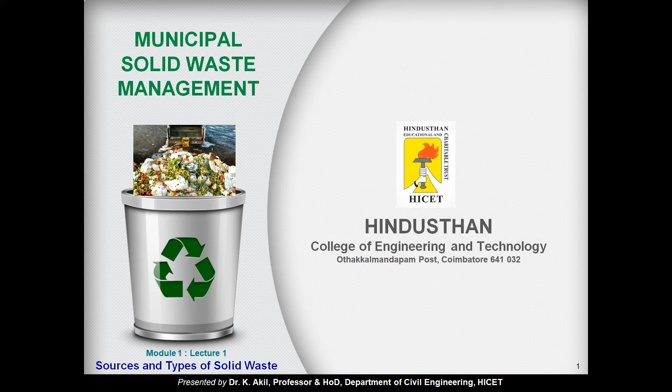The learning objective is to gain knowledge on the types and sources of solid waste. Due to rapid increase in the production and consumption processes, societies generate as well as reject solid materials regularly from various sectors. The considerable volume of waste thus generated and rejected is called solid waste. In other words, solid waste are the waste arising from human and animal activities that are normally solid and are discarded as useless or unwanted.

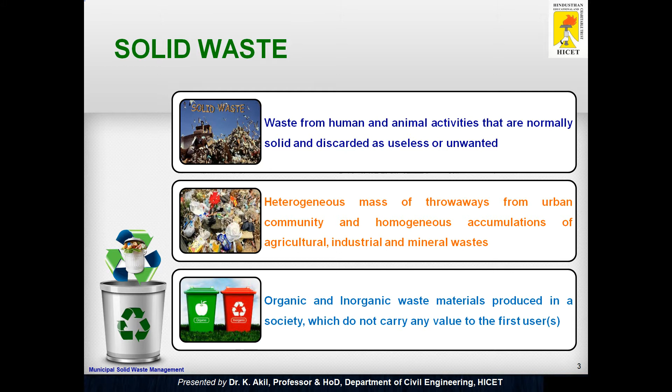Solid waste encompass both a heterogeneous mass of throwaways from the urban community as well as a more homogeneous accumulation of agricultural, industrial, and mineral waste. Solid waste are the organic and inorganic waste materials produced in a society which do not generally carry any value to the first user or the users.

Classification of solid waste. Solid waste are classified on the basis of source of generation and type. Source-based classification. Historically, the sources of solid waste have been consistent, dependent on sectors and activities, and these include residential, commercial, institutional, municipal, industrial, agricultural, and waste from open areas.

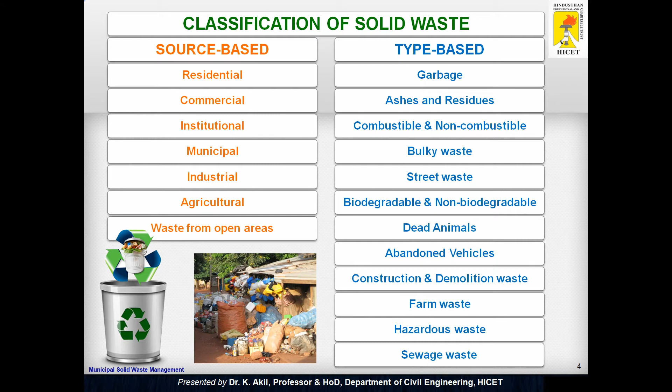Type-based classification. Classification of waste based on types, that is physical, chemical, and biological characteristics of waste, are garbage, ashes and residues, combustible and non-combustible waste, bulky waste, street waste, biodegradable and non-biodegradable waste, dead animals, abandoned vehicles, construction and demolition waste, farm waste, hazardous waste, and sewage waste.

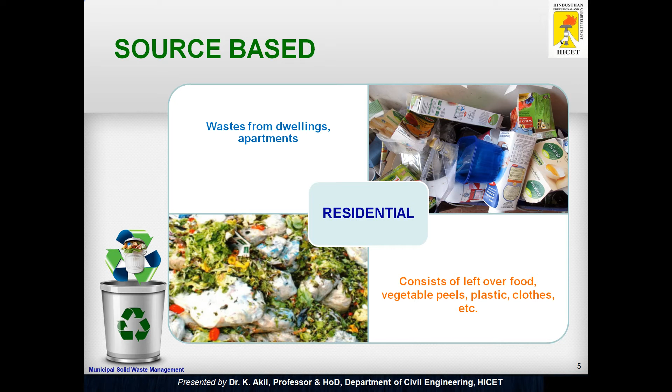Now coming on to the source-based classification. The first category is the residential waste. This refers to waste from dwellings and apartments and consists of leftover food, vegetable peels, plastic, clothes, ashes, etc.

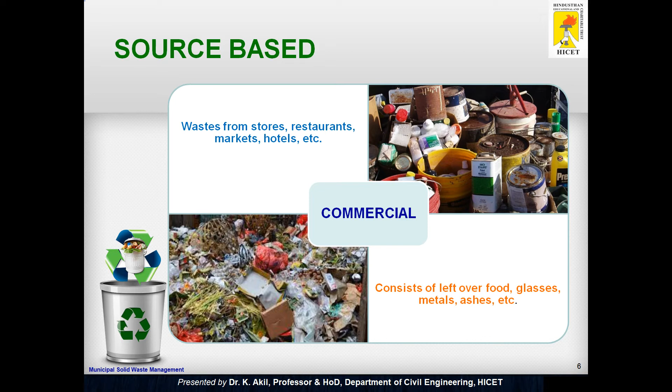The second category is the commercial waste. This refers to waste consisting of leftover food, glasses, metals, ashes, which are generated from stores, restaurants, markets, hotels, motels, auto repair shops, medical facilities, and so on.

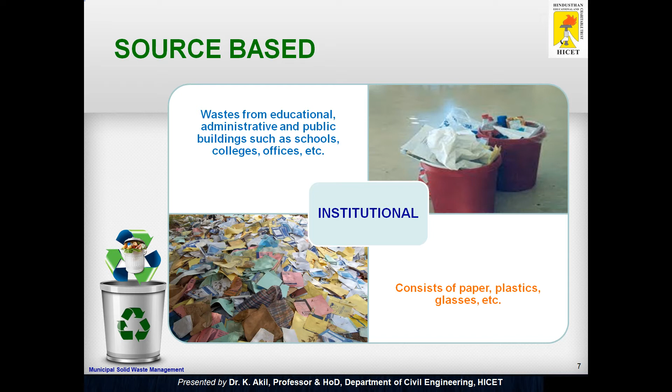The third category is the institutional waste. This mainly consists of paper, plastics, glasses, etc., which are generated from educational, administrative, and public buildings such as schools, colleges, offices, prisons, and so on.

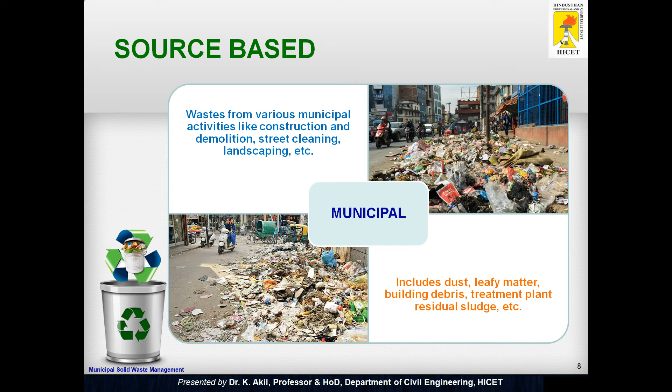The fourth category is the municipal waste. This includes dust, leafy matter, building debris, treatment plant residual sludge, etc., which are generated from various municipal activities like construction and demolition, street cleaning, landscaping, and so on.

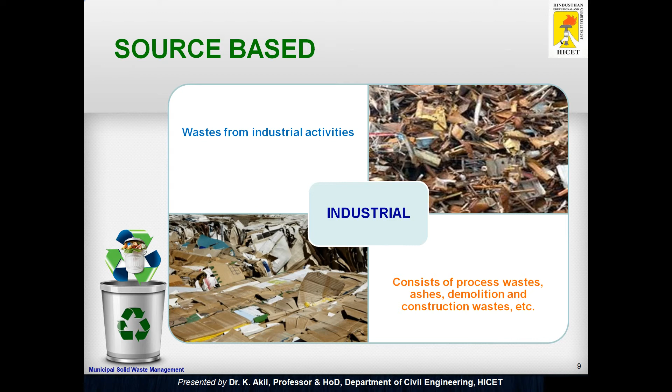The fifth category is the industrial waste. This mainly consists of process waste, ashes, demolition and construction waste, hazardous waste, and so on due to industrial activities. The next category is the agricultural waste. This mainly consists of spoiled food grains and vegetables, the agricultural remains, litter, etc., which are generated from fields, orchards, vineyards, farms, etc.

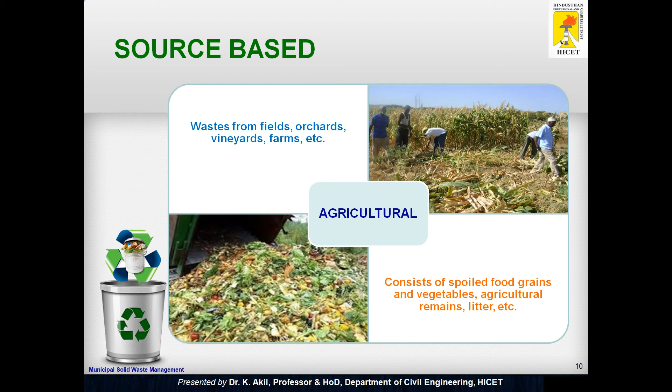The last category under source-based classification are the waste from open areas, and these include waste from areas such as streets, alleys, parks, vacant lots, playgrounds, beaches, highways, recreational areas, and so on.

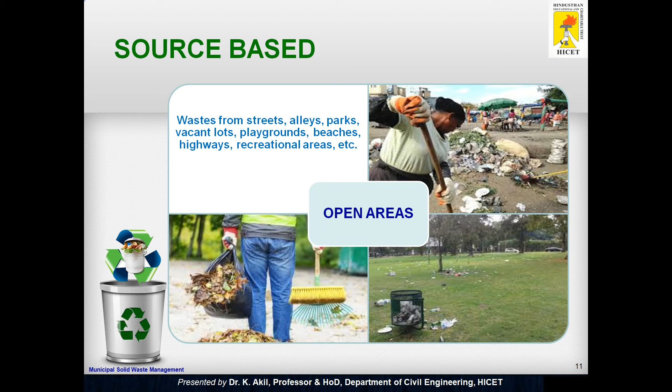Coming on to the type-based classification. The first category is the garbage. This refers to animal and vegetable waste resulting from the handling, sale, storage, preparation, cooking and serving of food. Garbage comprising these waste contains putrescible organic matter which produces an obnoxious odor and attracts rats and vermin. It therefore requires special attention in storage, handling and disposal.

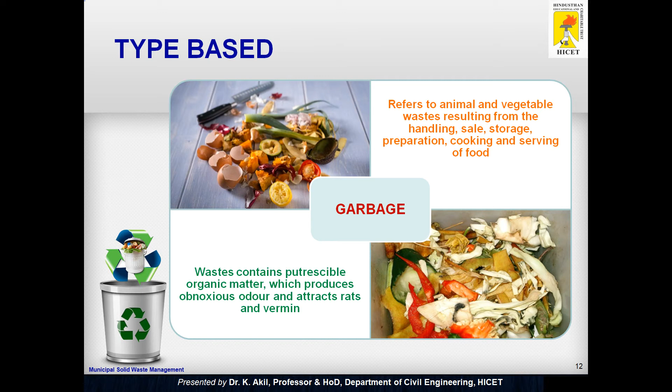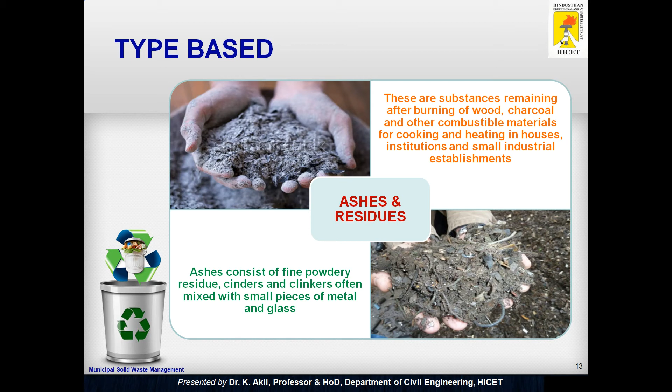The second category is the ashes and residues. These are substances remaining from the burning of wood, charcoal, coal, coke and other combustible materials for cooking and heating in houses, institutions and small industrial establishments. Ashes consist of fine powdery residues, cinders and clinker often mixed with small pieces of metal and glass. Since ashes and residues are almost entirely inorganic, they are valuable in landfill.

The third category is the combustible and non-combustible waste. These consist of waste generated from households, institutions, commercial activities, etc., excluding food waste and other highly putrescible material.

Typically, combustible materials consist of paper, cardboard, textile, rubber, garden trimmings and so on. And non-combustible material consists of such items as glass, crockery, tin and aluminium cans, ferrous and non-ferrous metals.

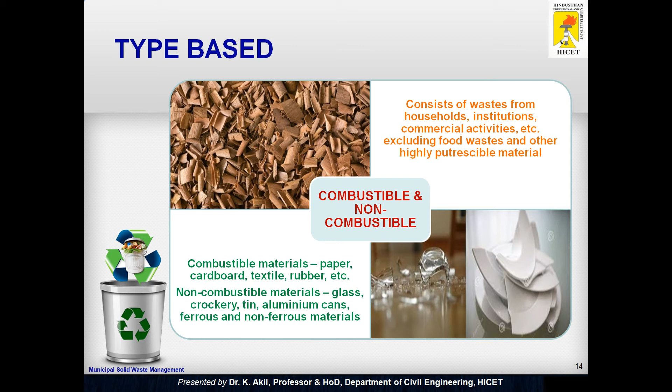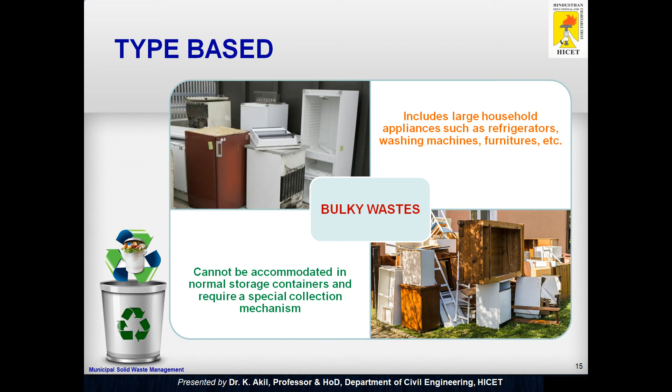The fourth category is the bulky waste. These include large household appliances such as refrigerators, washing machines, furniture, crates, vehicle parts, tires, wood, trees and branches. Since these household wastes cannot be accommodated in normal storage containers, they require a special collection mechanism.

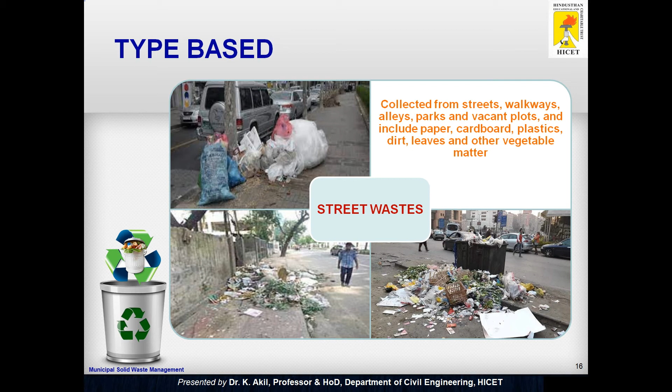The fifth category is the street waste. These refer to waste that is collected from streets, walkways, alleys, parks and vacant plots and include paper, cardboard, plastics, dirt, leaves and other vegetable matter.

The sixth category is biodegradable and non-biodegradable waste. Biodegradable waste mainly refers to substances consisting of organic matter such as leftover food, vegetable and fruit peels, paper, textile, wood, etc., which are generated from various household and industrial activities. Because of the action of microorganisms, these wastes are degraded from complex to simpler compounds. Non-biodegradable waste consists of inorganic and recyclable materials such as plastic, glass, cans, metals, etc.

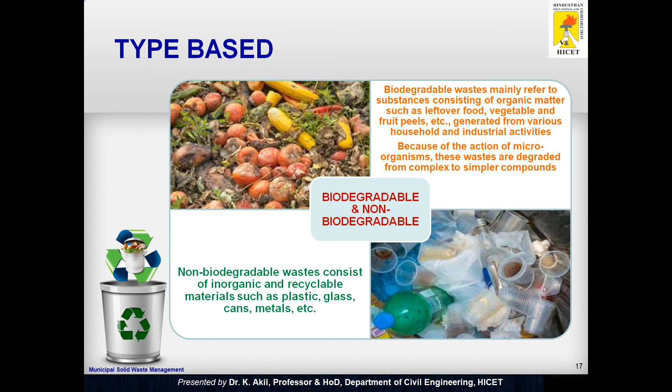The seventh category includes the dead animals. With regard to municipal waste, dead animals are those that die naturally or are accidentally killed on the road. This category does not include carcasses and animal parts from slaughterhouses, which are regarded as industrial waste.

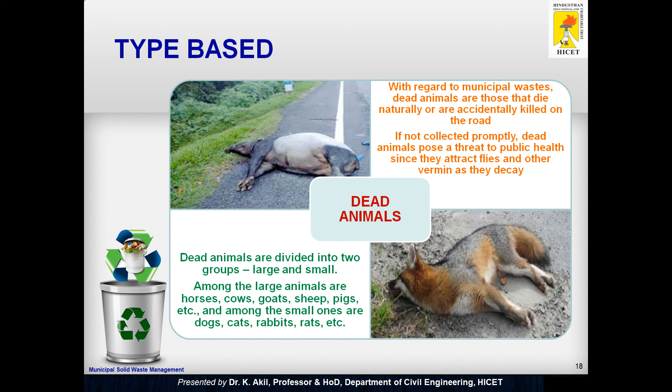Dead animals are divided into two groups, large and small. Among the large animals are horses, cows, goats, sheep, pigs, etc., and among the smaller ones are dogs, cats, rabbits, rats, etc. The reason for this differentiation is that large animals require special equipment for lifting and handling when they are removed. If not collected promptly, dead animals pose a threat to public health since they attract flies and other vermin.

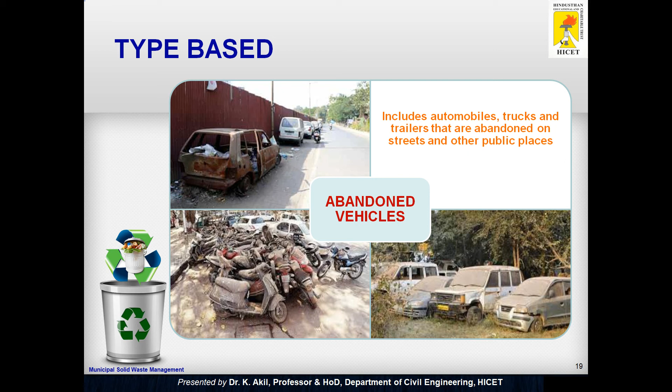The eighth category is the abandoned vehicles. This category includes automobiles, trucks and trailers that are abandoned on streets and other public places. However, abandoned vehicles have significant scrap value for their metal, and their value to collectors is highly variable.

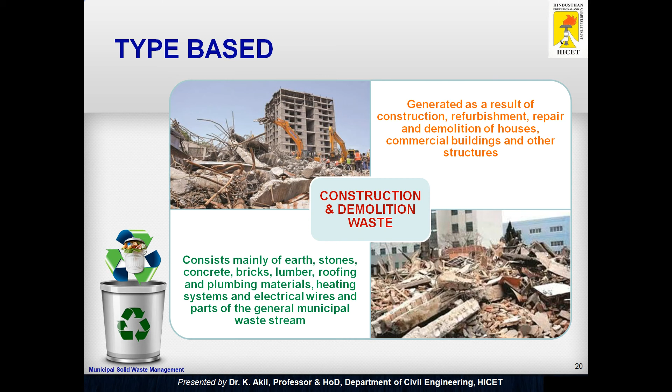The ninth category is the construction and demolition waste. These are wastes generated as a result of construction, refurbishment, repair and demolition of houses, commercial buildings and other structures. They consist mainly of earth, stones, concrete, bricks, lumber, roofing and plumbing materials, heating systems and electrical wires and parts of the general municipal waste stream.

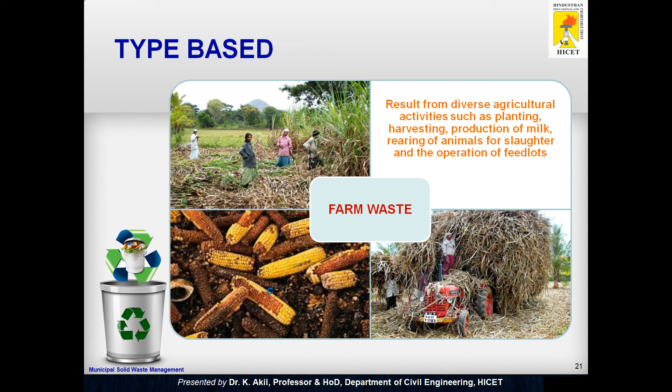The 10th category is the farm waste. These wastes result from diverse agricultural activities such as planting, harvesting, production of milk, rearing of animals for slaughter, and the operation of feedlots. In many areas, the disposal of animal waste has become a critical problem, especially from feedlots, poultry farms, and dairies.

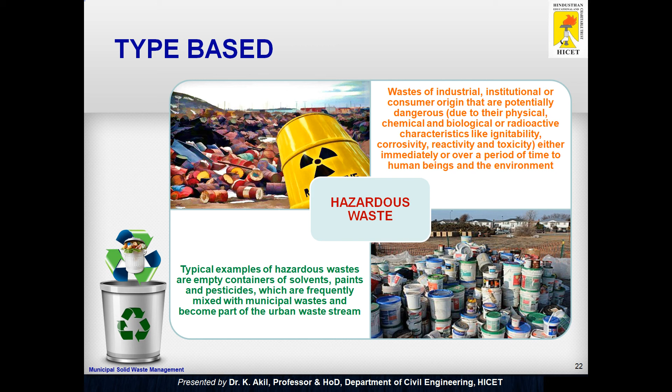The 11th category is the hazardous waste. Hazardous wastes are those defined as waste of industrial, institutional, or consumer origin that are potentially dangerous either immediately or over a period of time to human beings and the environment. This is due to their physical, chemical, biological or radioactive characteristics like ignitability, corrosivity, reactivity, and toxicity. Typical examples of hazardous waste are empty containers of solvents, paints, and pesticides, which are frequently mixed with municipal waste and become part of the urban waste stream.

The last category under type waste classification is the sewage waste. The solid byproducts of sewage treatment are classified as sewage waste. They are mostly organic and derived from the treatment of organic sludge separated from both raw and treated sewage.

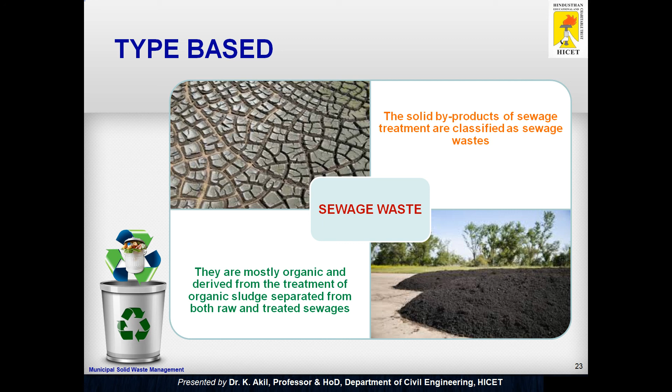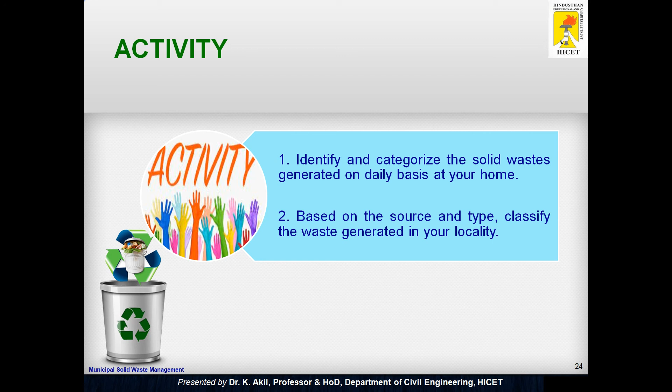So that's with respect to the types and sources of solid waste, and for all the viewers of this presentation, we have two activities. First, identify and categorize the solid waste generated on a daily basis at your home. Second, based on the source and type, classify the waste generated in your locality. Solid waste management is always a good choice today for a healthier tomorrow.